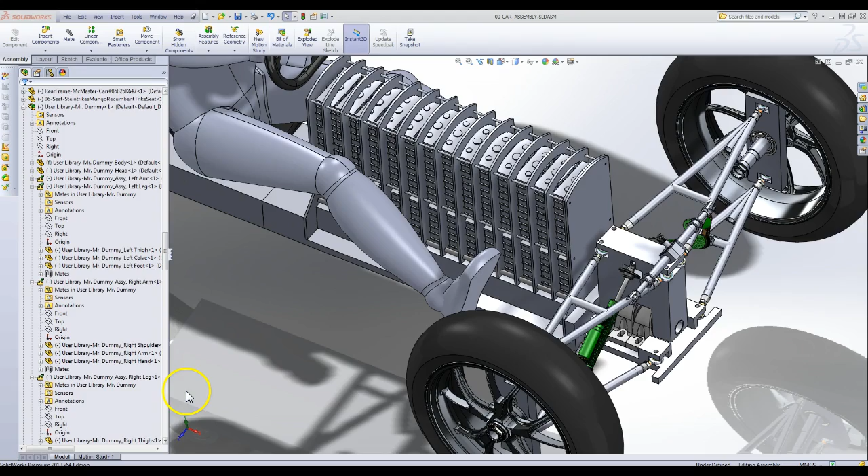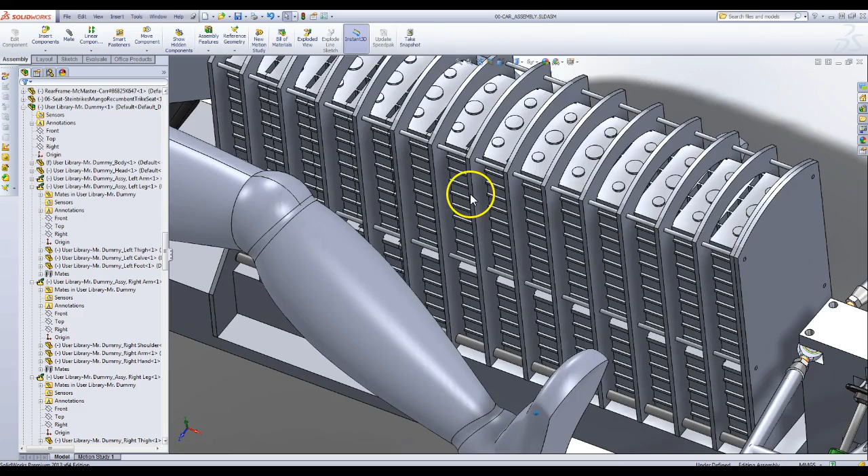I just wanted to show some progress on this electric tilting three-wheel car I'm working on. So what I did today is I put in this tilting, or this frame that bolts into the chassis. And the way I did this is I'm using M6 bolts, or it's actually just one really long M6 rod, which is a 6mm outside diameter rod.

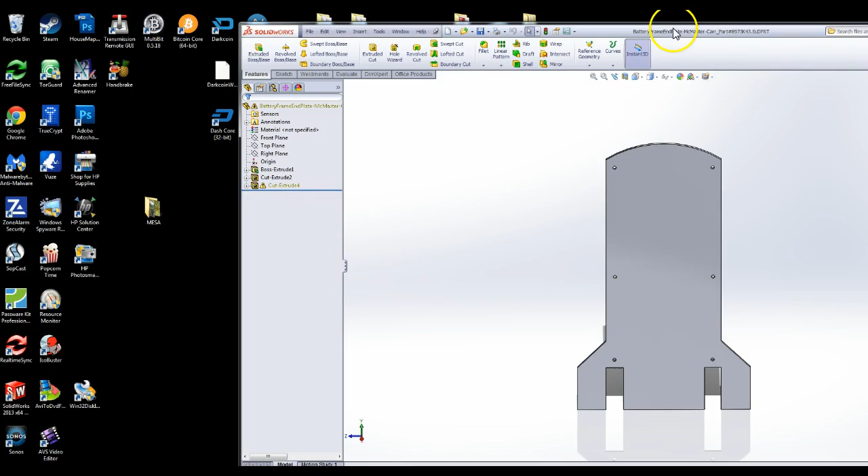And then I use these machined aluminum frames, and let me see if I can show you what these frames look like. Starting with just the end plate, this is what the end plate looks like. So on both sides of the battery pack I'm going to have these end plates, and you can see the 6mm holes in them.

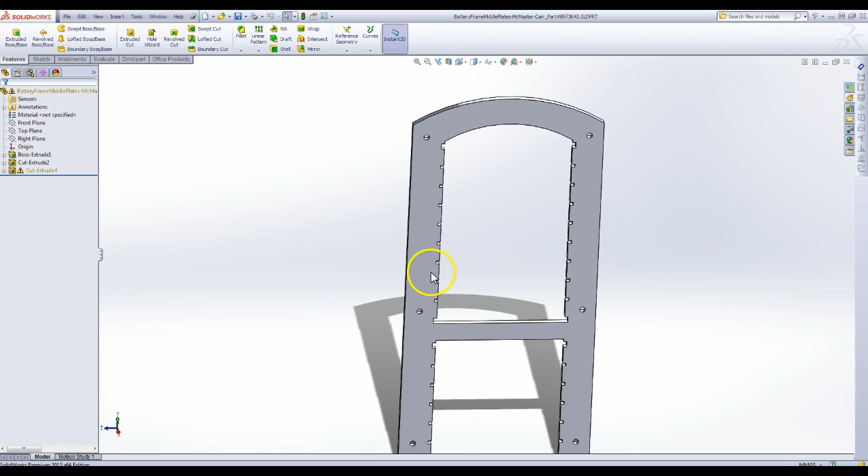And then let me pull up the middle plates. So this is what the middle plates look like. The middle plates are machined so that they can hold the battery in place, and then they have these holes in them to run the rods through them. And then the spacers are just standard spacers from McMaster-Carr, made of aluminum.

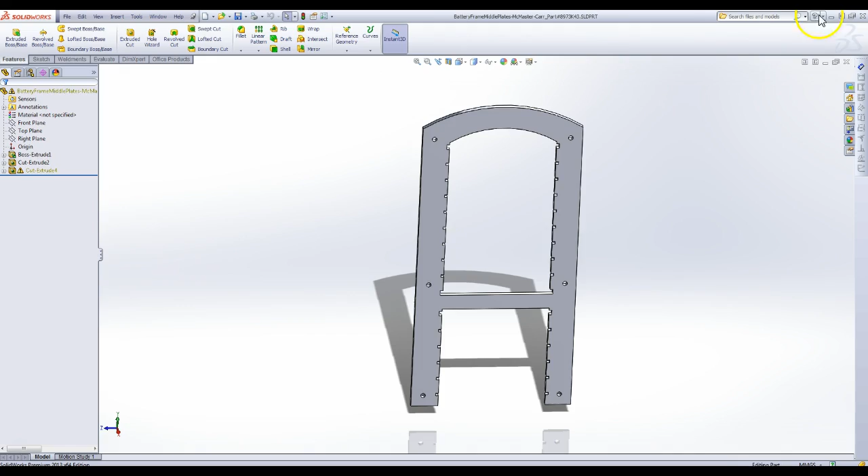And then you put in the one long 6mm threaded rod, and then the idea would be at each end you would put a nut, and you would just thread it on and essentially compress this whole thing, and it would hold the battery pack in place.

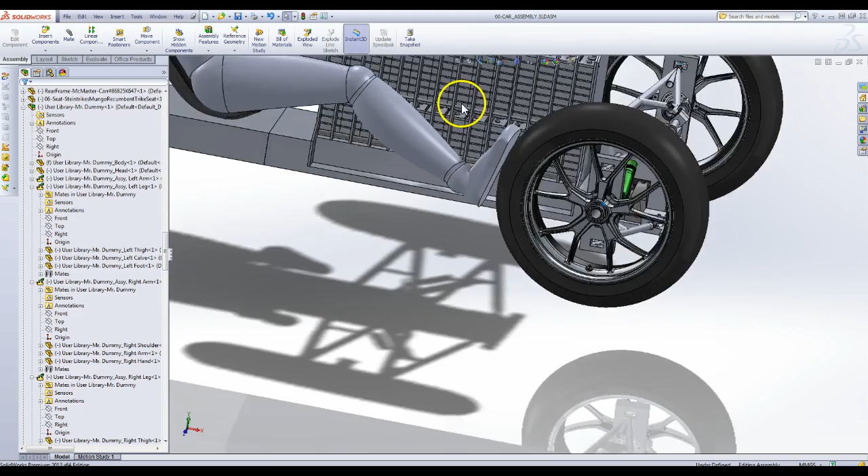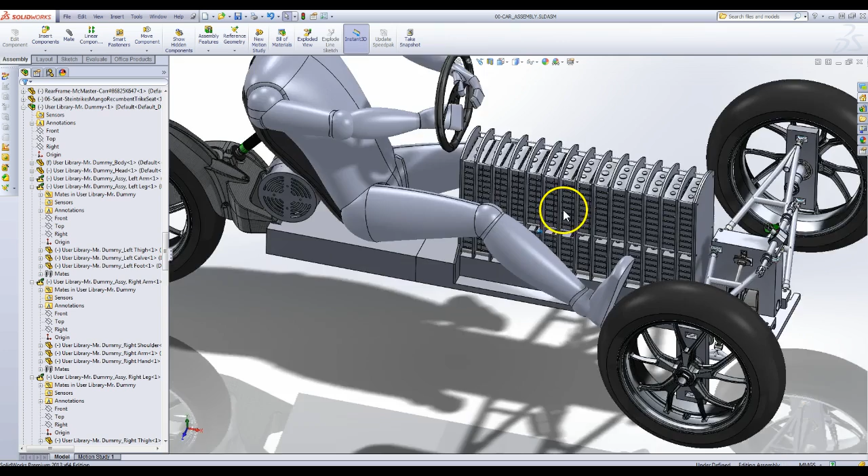And so the way I designed this, I don't know if you can see this, but there's room here between each battery pack. I might add a little bit more room here for the cabling, but the idea would be that there's room for the cabling so you can connect all of these batteries in series. So I'd like to have all 26 batteries in series, which would give me a high enough voltage to run the motor at a very high RPM.

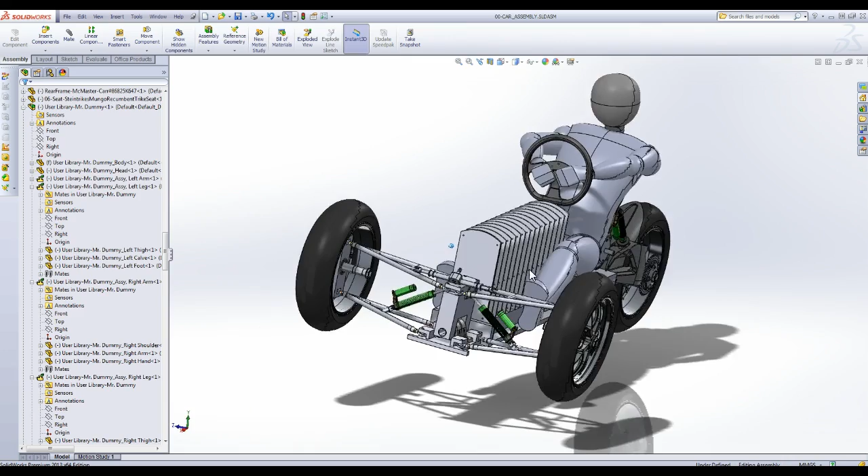So this is sort of where I am right now. You can see it works really nicely. I think the next step is to take an aluminum sheet and then wrap it around this, and that's the main frame of the car. If you see what's going on here, that's the main frame of the car, and then I'll have to have some kind of front frame to go over this tilting frame. But I'm just trying to keep everything very simple, keep everything very light.

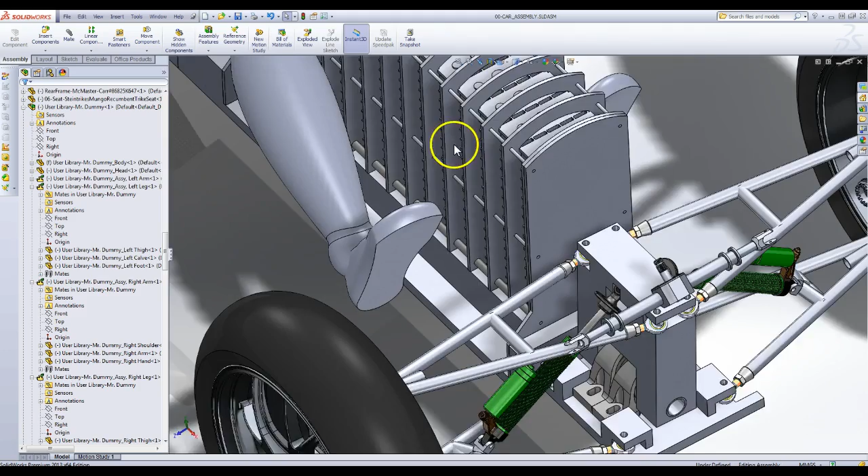You can see I put in the spacers here, but I haven't put them in for each individual rod. I need to put in all those spacers. There's going to be a lot of mating in SolidWorks. So anyone who plays around with SolidWorks knows that that's a big pain to do all that. But that's where I am right now. So this is the car. It's starting to look more like a car every day.